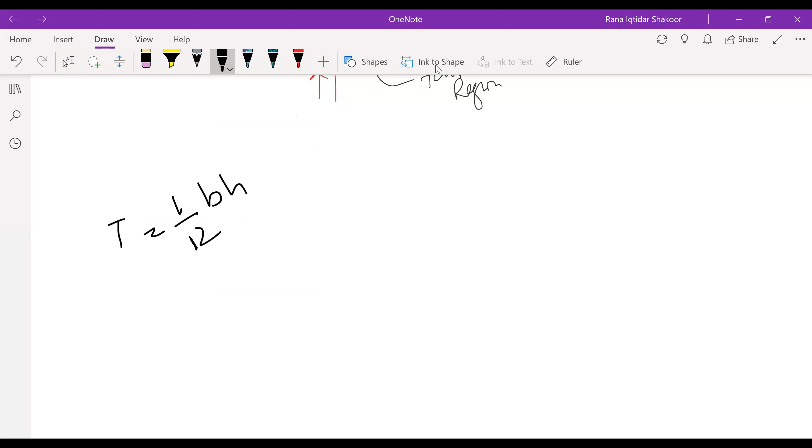I just want to make something more clear. That was the second moment of area, and that second moment of the area was equal to, when I selected that one, I was equal to 1/12 BH cube, right? This was I, equal to BH cube, right.

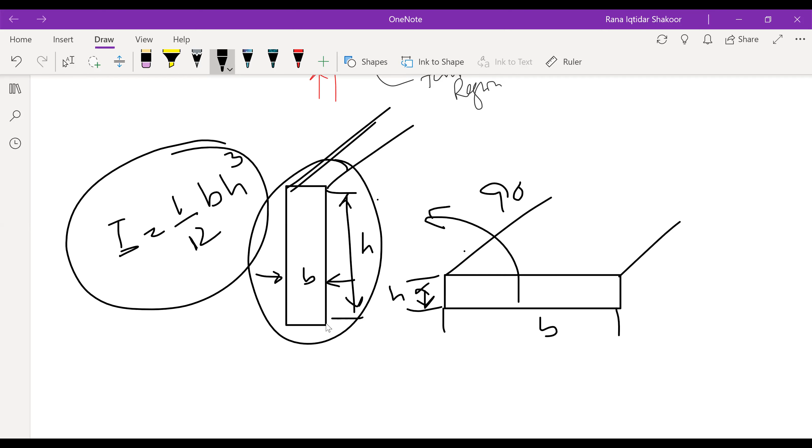In this particular case, this is your B and this is your H, right. So I of this will be far greater than I of this shape, since I told you in the last lecture that I relates with the stiffness. So if I is greater for this shape, the stiffness will be higher, and when you apply load in this direction, it will never bend as compared to this one.

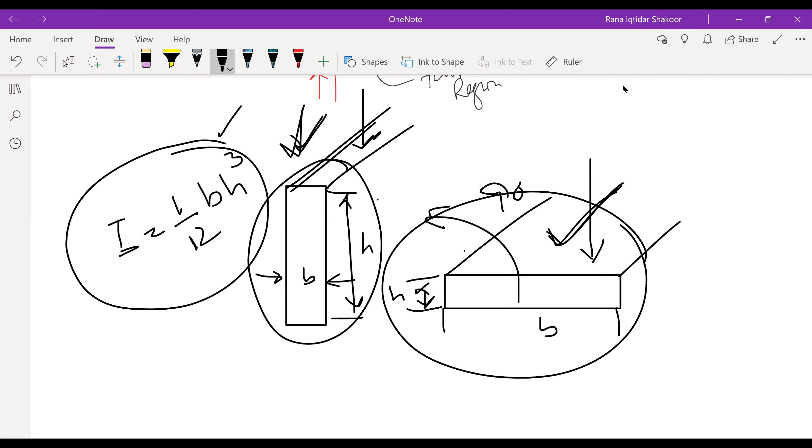So this was the one concept which I wanted to make clear before starting the second part of this lecture. Now I am going to share the presentation.

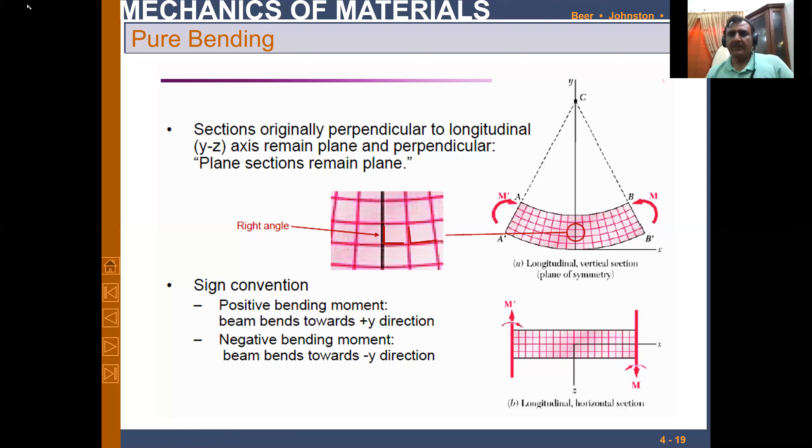Right, so we were here. So since we are dealing with pure bending, if this is the positive bending, because the bending is in the positive y direction, right. And if I bend this into this one, the bending is into the negative y axis because it is going this way. With reference to the neutral axis, it is in the negative one, and it is in the positive y direction. So this is the curvature which it is making. This is the positive bending towards the positive y axis, and this is the negative bending towards the negative y axis.

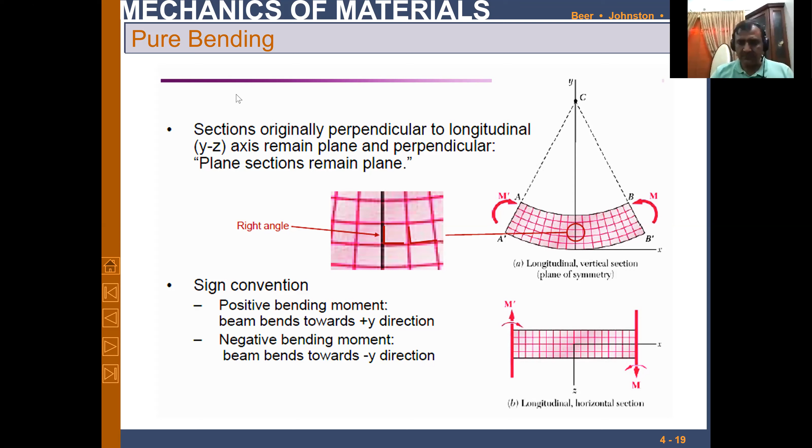Now let's start some mathematics. Since we have already discussed that there is no rotation involved, no angular deformation involved, since there is only change in length - upper is under compression, lower is under tensile - there is only change in length, so there is no shear stress involved. Top surface is contracting, bottom surface is expanding. Since there is a change, we will deal with only sigmas and epsilons, normal stresses and normal strains.

There is a line that is called the neutral surface. Here it is called the neutral axis, on which strains are zero, and resultingly stresses are zero. This is what we have already discussed in detail many times. So this rho over here, you can see this is rho, right? This rho is basically the radius of curvature, and this is the neutral axis. So we know that epsilon x will be lesser than zero because compression is there, and at the neutral axis it will be zero, and on this surface it will be greater than zero, because tensile forces are there, so resultingly tensile strain will be there.

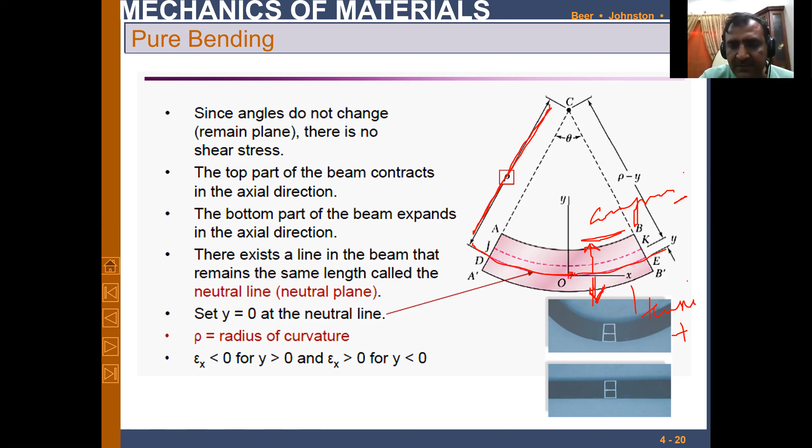In this case for compression, measuring from the neutral axis, y will be positive and greater than 0, and in this other case y will be less than 0, because your reference axis exists on the neutral axis, as shown here.

Now if we want to calculate epsilon x, it will be the extension over the original length. What is the extension? Rho is basically, we know S equals R theta. Theta is there because the angle is theta.

What will be R? In this particular case, the original R is rho, and after deformation, this surface is basically the one that shrinks.

If this is the y distance at a particular distance y from the neutral axis, then it will be rho minus y. So rho minus y into theta, minus rho theta, over the original length which is again rho theta.

So you cancel out theta, and we're left with only epsilon x equals minus y over rho. Again, what is y? Y is the distance in the positive y direction above this neutral axis.

This is a linear relationship, because there's no quadratic or square term. As y increases, epsilon x increases on either the positive or negative side, and when it is 0 at the neutral axis, epsilon x will be 0, and resultingly sigma x will be 0.

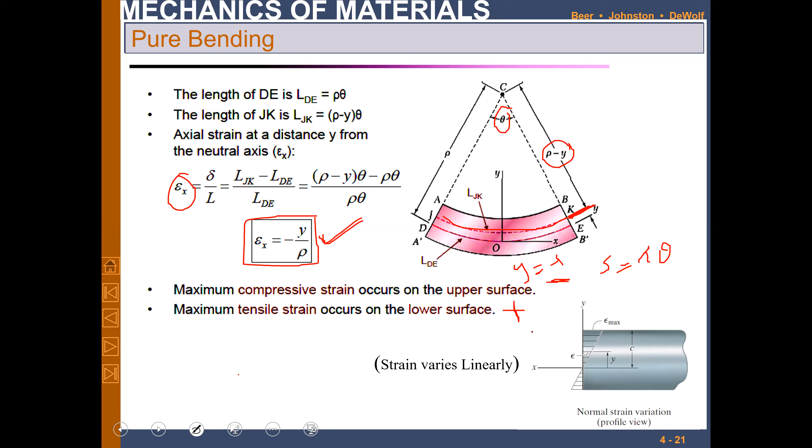So epsilon x in this particular case will be a negative quantity, and in this case it will be a positive quantity, because here y will be positive, and there y will be negative. So epsilon maximum will be at c.

This is the y distance, and the maximum distance is c from the neutral axis. Obviously it will be maximum when y is maximum, and y maximum is at c.

So epsilon max will be minus c over rho for the top surface, and for the bottom surface epsilon max will be c over rho, because here y is positive, and there y is negative.

So the ratio, epsilon was minus y over rho, so epsilon over epsilon max will be minus y over c, and epsilon equals minus y over c times epsilon max. When y is maximum, it becomes c over c which is 1, so epsilon becomes maximum.

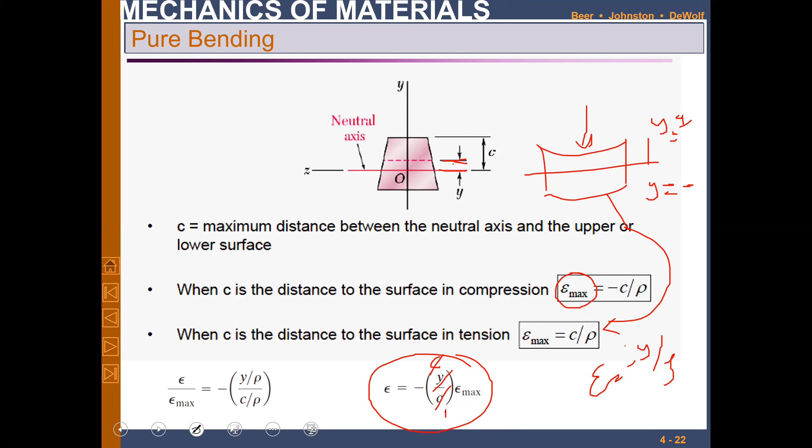It depends where y is, on both sides. On the top surface it will be minus epsilon maximum, and on the bottom surface it will be positive epsilon maximum.

And for sigma x, by Hooke's law, sigma x equals E times epsilon x, which equals minus E times y over rho, giving the final expression. And epsilon, as we've already found, is minus y over c times epsilon maximum.

Likewise, for sigma max, that will be minus E c over rho, and when you take the ratio of this versus that, you end up with an almost similar expression.

When you have maximum epsilon at y equal to c, you will have maximum normal strain, so you will have maximum normal stress there. Normal stress can be defined as compressive or tensile. The topmost surface will be in compression, and the bottom surface will be in tension, because there will be tensile forces there.

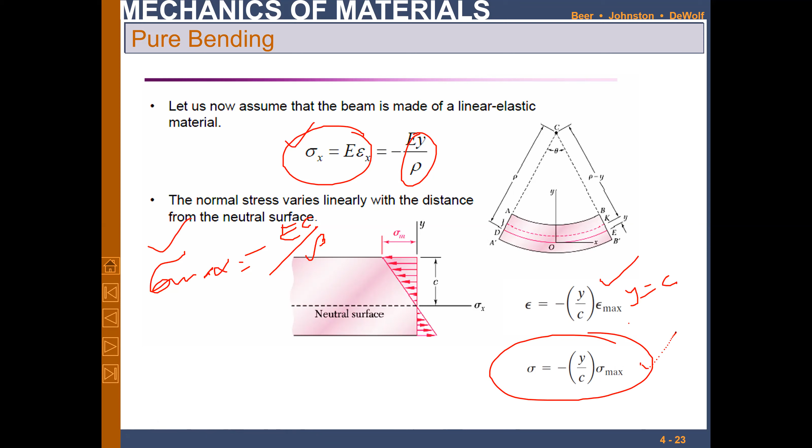Now we know that sum of all forces equals 0, because on the top surface it is compressive and on the bottom it is tensile. So they are equal and opposite. Sum of all forces will be equal to 0, but sum of moment will not be equal to 0. So dF is equal to sigma dA.

This is what we have already done, sigma dA. Sigma is basically minus y over c times sigma max, dA, and we simplify it. It will come like this. What is this? This is basically Q, the first moment of area. Since this is equal to 0, either this equals 0 or this equals 0. This could not equal 0, this could not equal 0, this could not equal 0. So y dA equals 0, and this defines the centroid.

This is what we have already done. So it means the centroid is where Q is 0, which is the definition of centroid. So the neutral axis is just the centroid - it means the neutral axis passes through the centroid of the object. Since this is a linear relationship, if we go upward, all forces will be compressive in this part, and below y, for negative y, all forces are basically tensile.

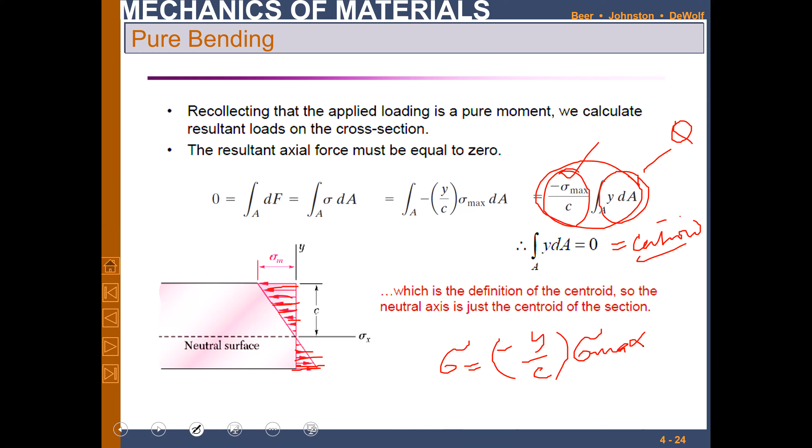There is a linear relationship here, because we have just seen that sigma was minus y over c times sigma max. So this is a linear relationship. Sigma will be maximum when y equals c, so sigma will equal sigma max, and the minus sign defines whether the surface is in compression or tension.

Since moments are not equal to 0 again - moment is about the z-axis, so we are applying moment about the z-axis, and that is not equal to 0. I am saying again and again, the forces are equal and opposite so they nullify each other, but the moments are not equal to 0 about the z-axis. So how will we calculate the moment? Moment will be y into dF.

This is what we already did at the start. dF is equal to sigma dA times y, and sigma is y over c times sigma max, dA. When we simplify it, we get sigma max over c times y squared dA. Now what is this? This is basically the second moment of area, or moment of inertia I. So if this is M, this equals sigma max over c into I, so sigma max will be Mc over I.

For any value other than c, it will be minus My over I, because sigma max over c is minus sigma over y. When you put this expression and mathematically solve it, you end up with this one. So this is for the maximum value, which will be at c. For any other point y from the neutral axis, you use this expression.

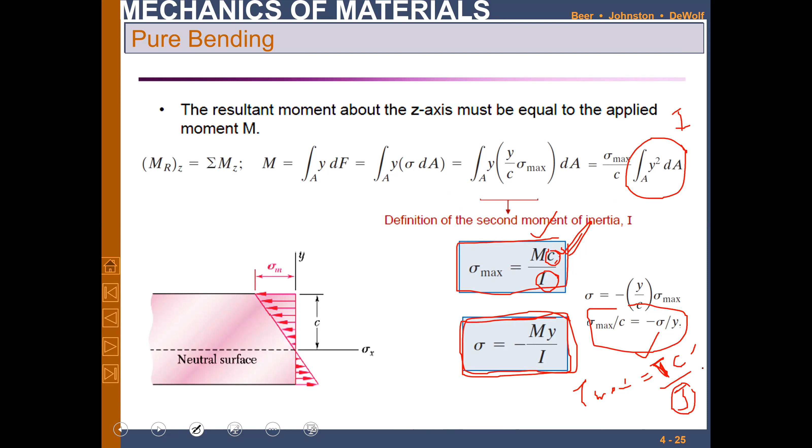This is another expression called section modulus. This is simply the recalculation or modification of the similar expression.

Sigma max is MC over I, or M over S, where S is called the section modulus. I is the section moment of inertia, and S, which is I over C, is the section modulus. So in terms of section modulus, sigma max will be M over S. What is the importance of this?

Now you have two objects having the same cross-sectional area. Look at this one: they have the same cross-sectional area, 4 into 6, 24 inch square, and 8 into 3, 24 inch square. So they have the same area.

So if we calculate the section modulus I over C for this rectangular section, it's 1 over 12 BH cubed, and C, the centroid, is the center distance, which is h by 2 at the neutral axis. So the section modulus equals 1 over 6 BH squared.

Since area is constant for both, the section modulus depends on the height. The larger the height, the larger the section modulus, and section modulus has an inverse relationship with sigma max, which is the normal stress. The larger the section modulus, the smaller the maximum stress.

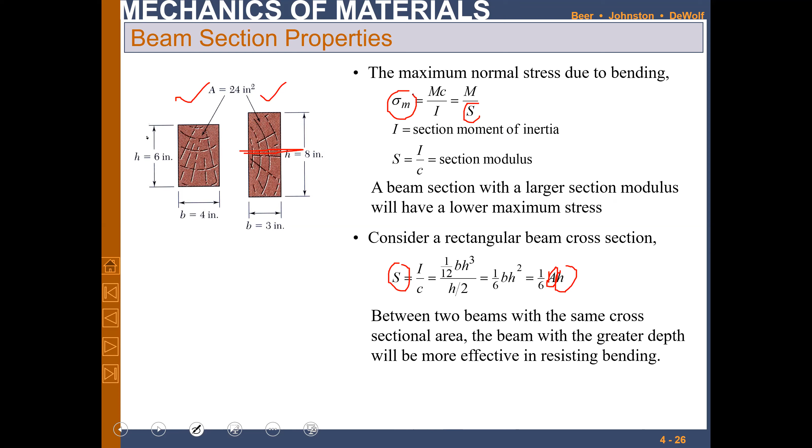Fine. The last slide is basically the elastic formula for bending. We have seen that whenever we have this curvature, rho is basically the radius of curvature.

But what do we want to calculate? We want to calculate, under a certain load, what curvature it will get. As we keep increasing the load, rho, the radius of curvature, keeps decreasing as the load increases.

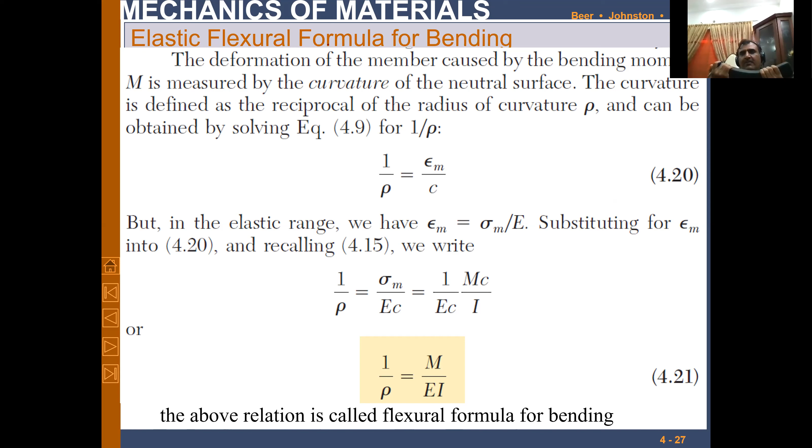So what about the curvature now? We want to calculate the curvature. Curvature is always calculated by taking the inverse of the radius of curvature, so 1 over rho will be the curvature.

This is the expression we already calculated, that epsilon max was C over rho.

This is equation 4.9, which we have already discussed. Epsilon max, by Hooke's law, is sigma m over E. Sigma max is E times epsilon m, or epsilon m is sigma m over E.

When we put this expression in, epsilon m gives us sigma m over EC, and sigma m we already calculated as MC over I. So 1 over rho becomes M over EI. This gives us the curvature.